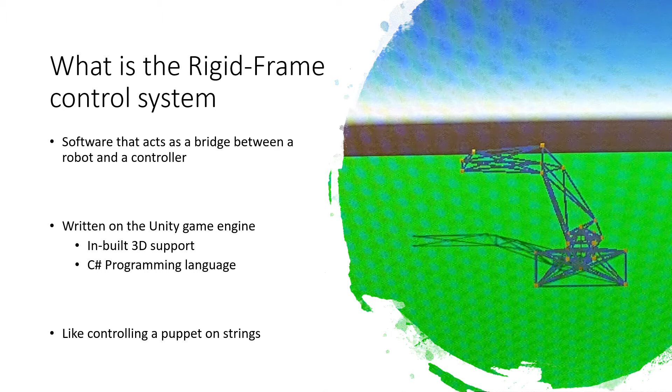So how does it work? Well, it uses a ball and stick framework system. Each point is connected between different sticks, which have set lengths, and the software, the simulation, is what's keeping those sticks to the right length, and that in turn keeps the whole framework, the rigid frame, all in one, all looking the right way.

In the animation at the moment, it's only the two endpoints of the arm which are being influenced in that scene by the two circles. The larger circle is pulling it towards the smaller dot, and the smaller circle is actually repelling it from the dot. All of this working just pulls the whole arm round, pulls it down, lets it go. And what the software would be doing is looking at all the joints on that model and working out the angle. It would then send those angles to a physical robot, and the robot will be moving around, mimicking it. That's the general premise of the robot.

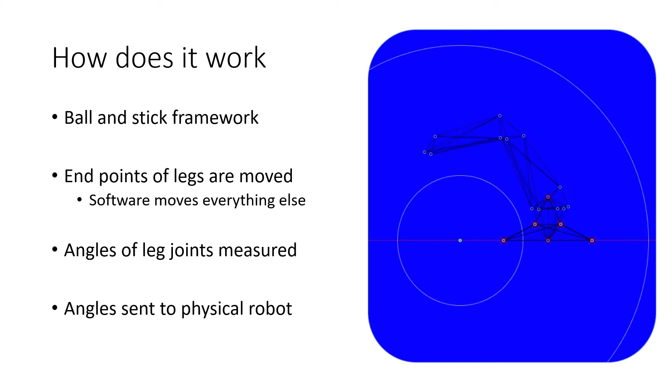What I'll now talk about is 3 of the 4 robots that I've built so far.

So the first of my robots is the Servo Walker. Essentially, I felt inspired one New Year's to use small SG90 servos. These are the low end of the scale of servos. They're a bit weak, but they're pretty cheap. You can get a pack of 10 for around 14 to 17 pounds.

So they're quite useful. I designed and put together this little robot using Blender, and it worked out quite well to establish the system, the initial version of the software. On the lower left, you can see where I was initially developing it.

I even built a small trailer to hold the battery packs, because as is usual for me, I get really excited when I'm building something for the first time, and I forget about including a whole load of things like any particular way of just holding the batteries or even any of the electronics. The upper left is kind of its final form. That's what I ended up with it in the end.

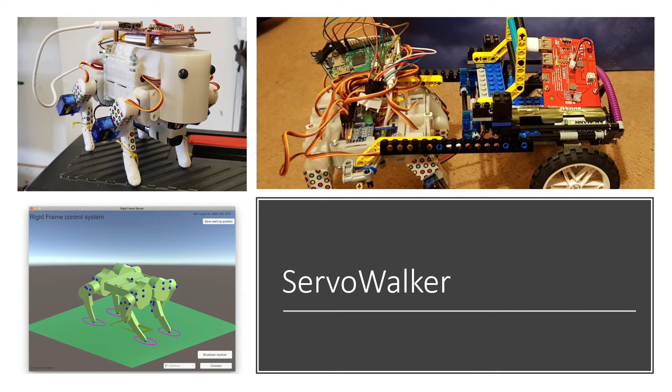Unfortunately, the weight of it became just a bit too much for the servos, but it was a nice exercise in getting things working. In the next slide is a short video of where I was testing some of the early control interaction.

So I'm actually using an Xbox controller here to cause it to tilt forwards and just generally move around. Something similar to what Boston Dynamics were doing with their little robot, and I was just copying the style of it.

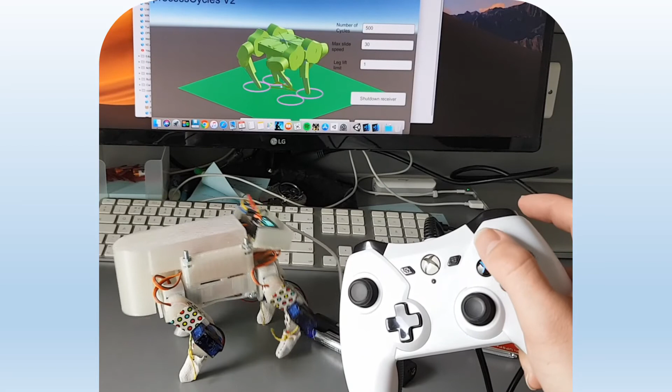So here's the Xbox controller, and I'm just using it to maneuver it. I do in a moment push the buttons to get it to lift individual feet, and this is where some of the flaws start to show with the software. In this case, the first leg, yeah, it falls over. That seems to be a common feature for all my robots at the moment, the falling over bit. But all of this helped me refine the software, getting the communication method working.

It was using a Raspberry Pi Zero to do all the workings over Wi-Fi.

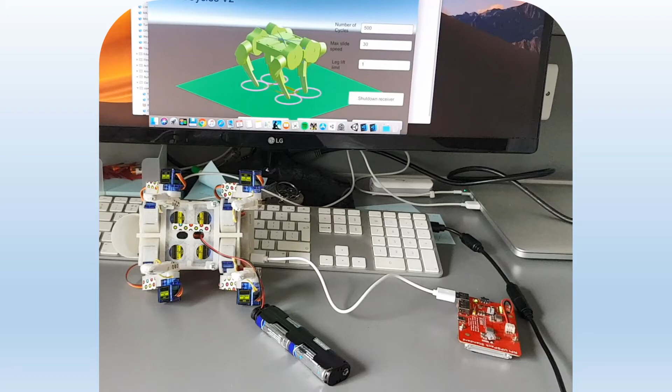The next robot is the Servo Sphere. This is where I wanted to experiment more with the software and have different stances, so the legs would start folded in, and then it would deploy them and move around. The next slide has a short animation showing the legs deploying and the lid flipping up.

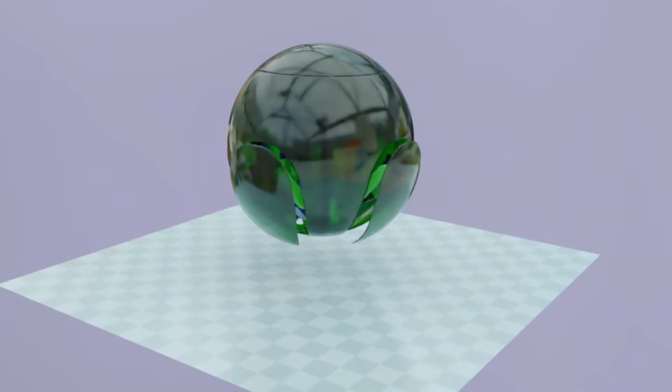This was done in Blender as well. I use it to create the components as well as the animations and any visualization. It's quite a useful piece of software. It also has 3D printing checks and utilities it can do to make sure the pieces will be 3D printable.

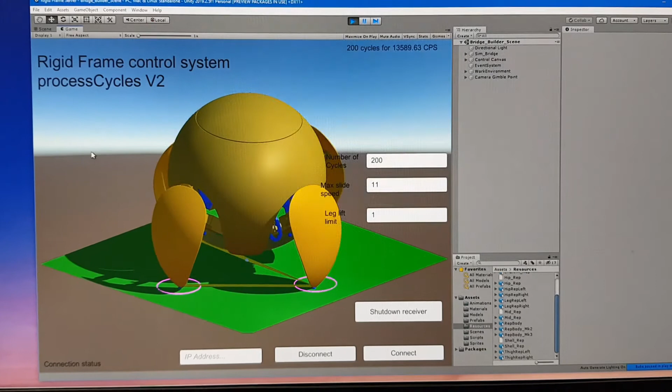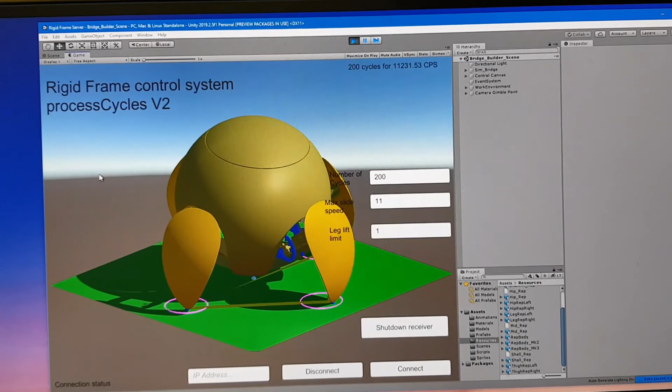This is the simulation. Again, I've updated it with the model of this particular robot, and it's just a general walking style. I use the arrow keys to move it along, and it works out its own lifting and moving of the legs, but all it's doing is moving the end points of each leg, and the rest of the frame just distorts to follow it. Then the simulation measures the angles of each limb and sends it to the robot.

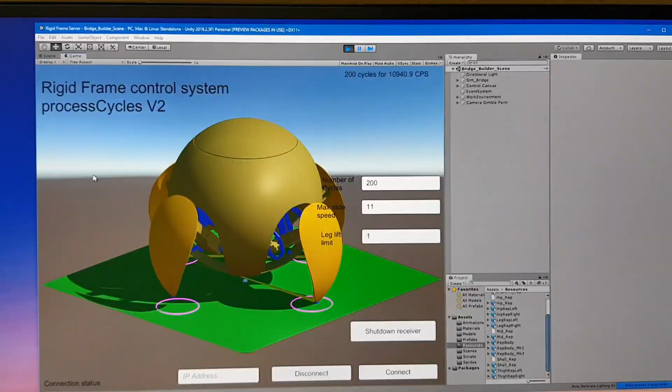A problem is that the simulation was running faster than the physical robot, and there were no checks to make sure the robot had moved into the right position. The next slide has a video demonstrating this: it starts up, dips down, lifts up, and then I tried getting it to move forwards. As just happened there, it tried to lift a leg, but it hadn't balanced itself. It was just running too quick, and as soon as it goes over too far, the servos can't cope, and it just struggles.

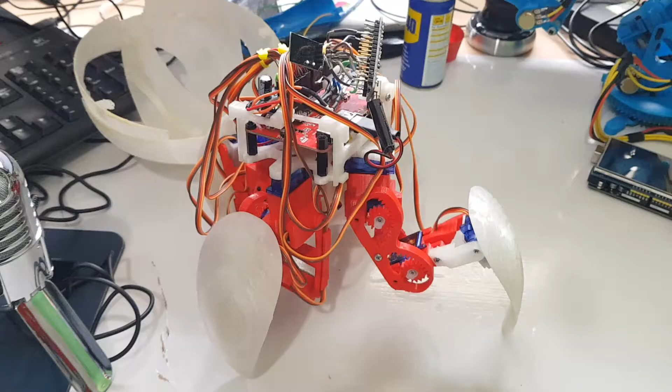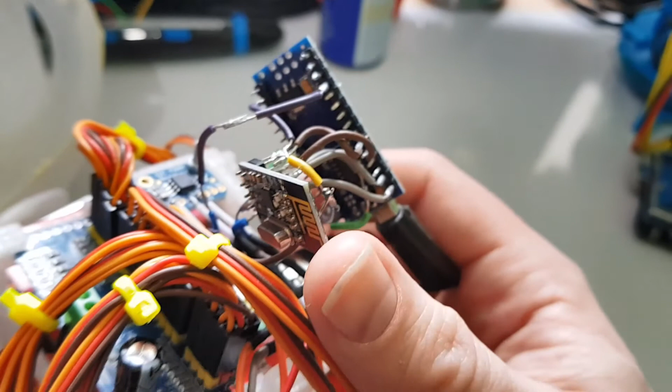So that one needed some upgrades, which I did end up doing. I'm just going to show where I upgraded the top. I've got a small RF24 board, I think, so that's just a normal radio frequency module. It's quite good, with lots of onboard libraries so you can easily connect to other aerials. That's an Arduino Nano, nice small form factor, a bit like a Uno in terms of power, but just smaller.

Here's a reprint of the gears. I've done nice sharp gears so they mesh a lot better. Those are done on the Ultimaker at the university. And that is the 16-channel PWM board, so I've fully maxed that out with 16 servos, 4 for each leg. That needs further calibration before I can continue testing with it.

But like a lot of times, I get bored easily, and I moved on to my next robot.

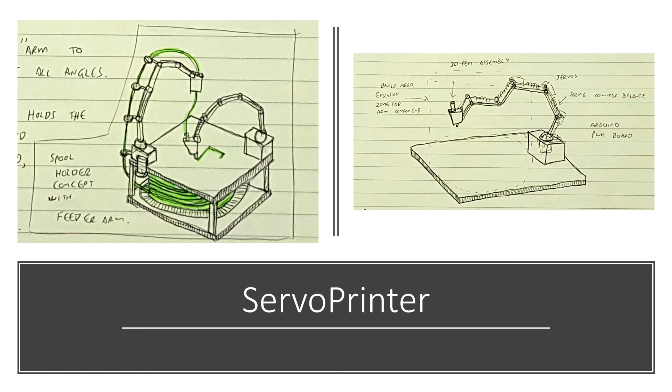So this is the third robot. It was going to be using servos, and it was going to be an arm initially of one, then two, so one would do the printing. This is going to be using a 3D printing pen or 3D printer head in order to print with. I got inspired by some sort of motors and linear actuators on Amazon, so I decided to switch from servos to linear actuators. In the next slide will be a short video of me testing the prototype.

So we'll move to more details of the actual arm itself. On the upper right is what it was initially wanted to be with the 3D printing pen - I was going to access its electronics and control it from there. The left hand picture is the final model, using I think a Sharpie pen as the template model, and in the lower right are all the pieces in their little groups ready for 3D printing.

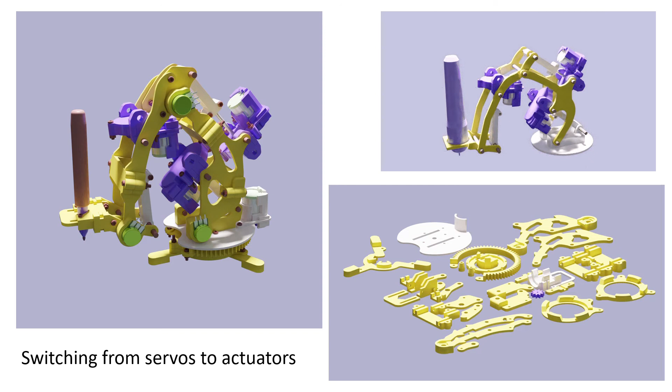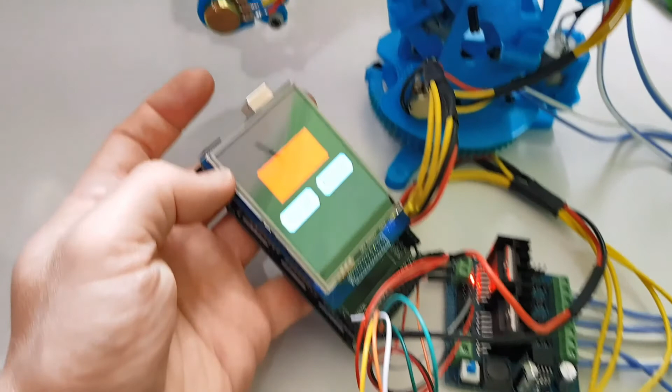Now here we have the 3D printed out model. I'm using rotary potentiometers for measuring the angle, and an Arduino Mega with an LCD screen. I've actually modified an example script for putting information on the screen.

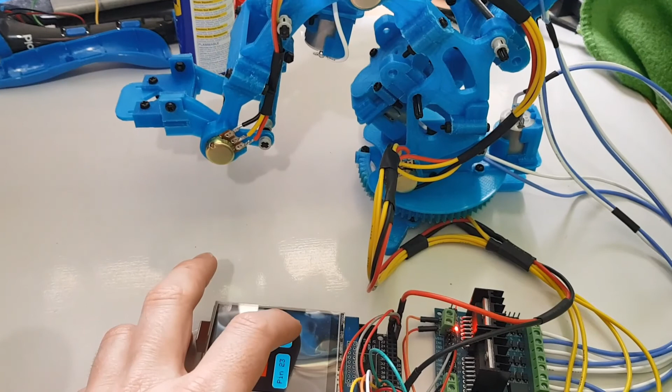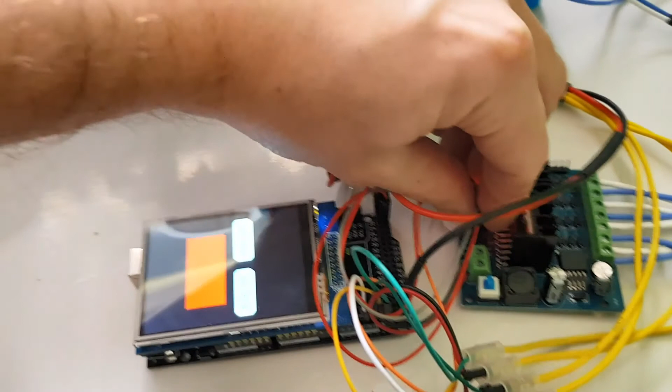So here I am using the buttons to move the lower actuator to move the whole top of the arm. This is still in development - I'm currently working on the motor control software side of it. Of course there's only one motor actually being controlled, so I've got to manually shift it across to a different motor at the moment, which is a bit difficult when you're holding a camera at the same time.

So you see I've shifted it so the end piece, that bit would be holding the actual pen itself. And that is the last of the 3 robots I've been making so far.

Oh sorry, yes, this is the 3D printing pen from Polaroid, and I've actually connected up 2 wires to the status LED. That's the only thing I could manage to do, because the solder for the buttons themselves needed too high a heat, which my soldering iron couldn't reach.

So at the moment I'm just working on getting it to draw pictures, and then I'll move on to my 4th robot. Each robot so far has helped me develop the software a bit further. In this case, it'll be getting it to follow G-code, which is normally what's generated for 3D printing files, to get it to follow a path and do something with the environment - setting up more involved control software.

So on that note, it takes me to my final robot. When I initially drew up the little diagram for this, it was going to be using servos, but now I'm going to be using a mixture of both - maybe servos for the articulation on the neck, for the beak, but mainly linear actuators or modified, updated versions of them for the legs.